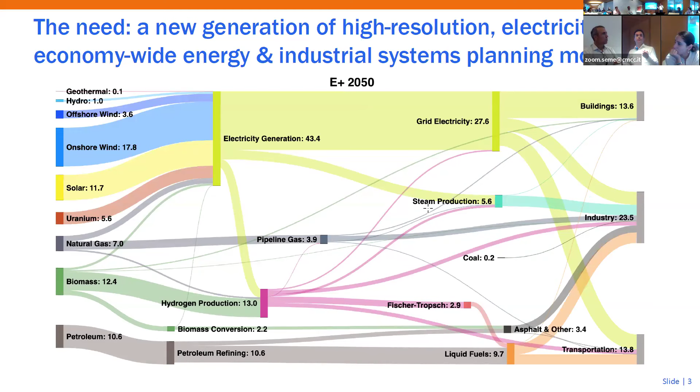So I'm sure you're all quite familiar with this picture, but the need for a new generation of models comes from the fact that with every net zero scenario, we will move from a world where a lot of energy consumption comes from different commodities like natural gas or coal to a world where a lot of it will come from electricity. And so we need electricity-centric energy system models where we have a highly detailed representation of the electricity system, because that's going to be connected to every other sector that we model.

And in a collaboration between my lab at Princeton and other researchers at MIT Energy Initiative and NYU, we've been developing a multi-sector energy system model called MACRO, which stands for Macro Energy System Capacity Expansion Resource Optimization Model. We started from macro and then we worked out the other words, but it's going to be a high-performance, bottom-up, electricity-centric energy system model. So high performance means that it's built to exploit distributed computing through decomposition methods to really increase the computational capabilities of the model.

And it's bottom-up, so it starts from the demand and the description of the technologies, and will build a capacity expansion model where we optimize capacity investments and operation of the system at the same time, with a detailed representation of different decarbonization pathways, for example, for industry. So a detailed representation of different options for iron and steel production, or ammonia production, or cement production. And we also wanted to have a granular temporal resolution, ideally hourly resolution, with a full representation of the operational year, and actually, we needed to have multiple weather years considered to increase robustness.

Macro will be open source, and it's being written with Julia and JuMP. It's not available yet. It's under development. We started development almost a year ago. And also, we wanted it to be plug and play in the sense that it's flexible and can incorporate different sectors, and you can swap in and out different sectors without changing anything of the structure.

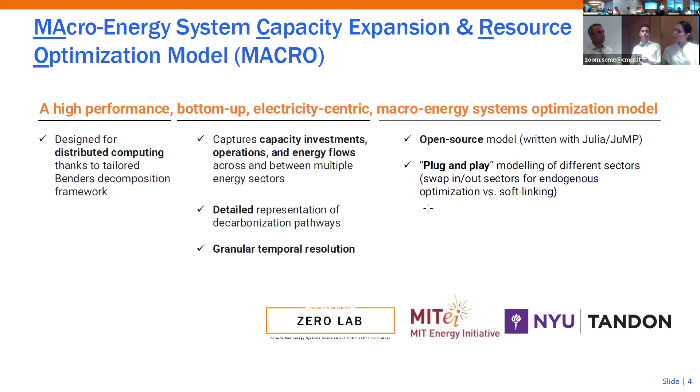So in comparison to what we call the current best-in-class bottom-up multi-sector energy system model, the main selling point for macro will be that it will have an improved computational performance that allows for a higher resolution. So if we compare to something like RIO, which is a commercial package some of you might know, it's been used for many high-profile studies like the Net Zero America study or Net Zero Australia study. So RIO typically considers for the US 20 or 30 zones and uses 41 representative days for a single year.

And from that, they then run the model. And as I said, it's been used for many high-profile studies, but the resolution is not very high. And also it does not allow to include discrete investment decisions. So discrete investment decisions might not be very relevant for electricity, because for transmission lines, we can always have multiple transmission lines.

But for big transmission lines, like DC lines, or for pipelines, if we are modeling natural gas or other commodities, then economies of scale really plays a role. And it matters whether the model thinks that it can build 3.5 pipes or it can build either 3 or 4 pipes. And so having the ability to include discrete planning decisions is key when modeling multiple sectors.

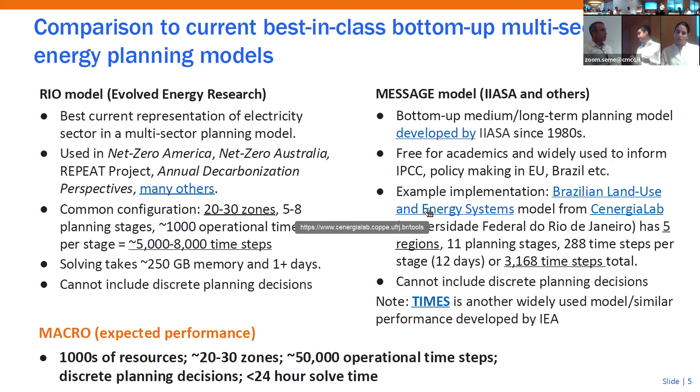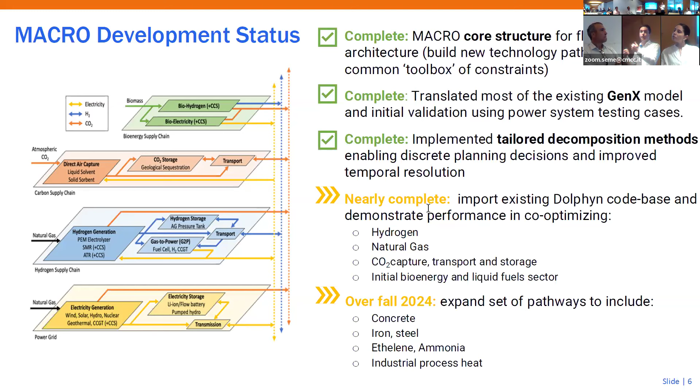So we have a library of constraints that has been implemented already and can be applied to any type of resource. And this, we hope, will really speed up the implementation of different sectors, because modelers don't need to recode everything from scratch. They can use the existing pieces.

So in the core structure of Macro, we model a multi-sector energy system as a multi-commodity flow network, where we have nodes and edges. These vertices can represent demand nodes, or they can represent transformations. Transformations move a commodity into another one, or into multiple commodities. A natural gas power plant is a basic example of a transformation: you transform natural gas into electricity and CO2. But with this structure, we can represent every industrial plant, every type of process. And so we hope that it's general enough that we can use it to really model all the sectors that I've put there.

And also we are building it in a way that is designed for distributed computing. It's being written having in mind that the main application for Macro will be with decomposition methods. So if you don't want to use a decomposition method, you probably won't use Macro. You will use some of the other models that exist, and that's perfectly fine, if you are happy with the resolution they can give you. With Macro, the idea is that you will use it to have high resolution models, and then you will use Benders decomposition or other decomposition methods to really enable that.

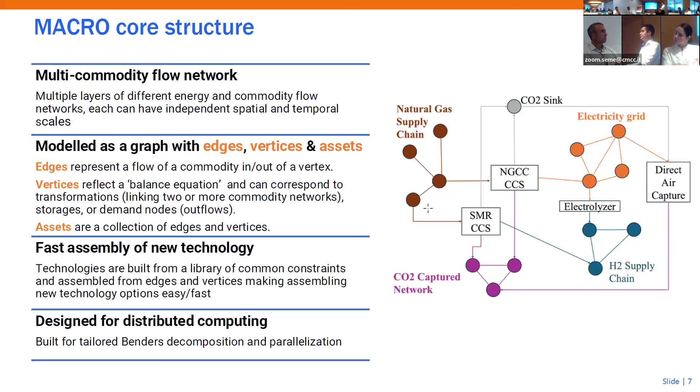So here is something I already said, but just some examples of what a vertex is. It can be a node, it can be a battery, it can be a demand node for hydrogen. A transformation can be like the red square, an electrolyzer. An edge can connect different vertices, and an asset is a collection of edges and vertices. So in this case, a natural gas CCGT is an asset that has a natural gas edge, an electricity edge, and a CO2 edge, coupled by the transformation.

So the philosophy of Macro is to have 3 different layers of users. There are going to be users who just interact with input and output files. So they don't need to know Julia. They don't need to know any actual mathematical equation. They just need to know how to build the input and how to interpret the output.

And then we have a second level, which we call modelers. They need to know Julia. So they need to be able to write some code. They might be familiar with Python and can use Julia, but they need to have some programming skills, but they don't need to know, for example, JuMP.

They don't need to know how you implement a constraint in an algebraic modeling language, because they can use the library of constraints that is already there. And so by doing this, what we have seen, for example, for China, I have a PhD student from Tsinghua University. He's implementing the iron and steel sector, and he doesn't know JuMP, he doesn't know mathematical optimization, but he knows the processes. And so by using the building blocks that Macro has, he can build the whole sector.

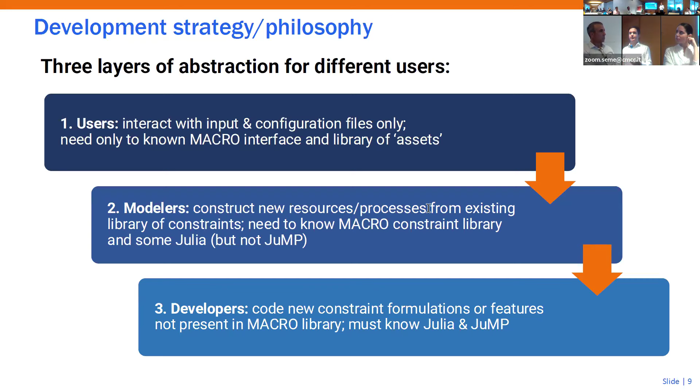And then there are the developers, who are probably going to be very few people that actually implement new features or new constraints or new modeling options. And so they have to know Julia and JuMP and be familiar with the philosophy of Macro and with the structure. But the idea is that the asset hides most of the mathematical complexity of the model. And so if you are a modeler, you just work on the assets. You don't need to know that there are vertices and edges and all this stuff. So hopefully this will allow for a lot of people to find Macro useful.

The general workflow in Macro is to start from the input data, which is going to be in a combination of JSON files and CSV files for time series. And then slowly, you build the model, you load all the networks, you generate the model, and this is an optimization model that then gets solved. And then with the solution, you need to have some downscaling methods to unpack your solution, because if you do a study like a net zero study for the US, you're not going to represent every single industrial facility in the US. You will represent some aggregation of that. And so you need to have some downscaling methods to then represent those results at the final resolution.

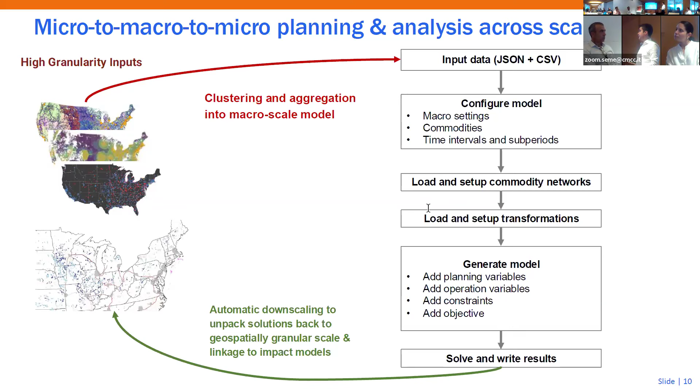All this results in increasing computational requirements for the models, right? Because everything that I talked about: having multiple commodities, multiple energy networks, having high temporal resolution, having a wide range of scenarios to improve robustness. So you want to consider different weather years, for example, for renewables, and having discrete investment and retirement decisions. So all these things will increase computational time very rapidly. And with the discrete investment decision, the increase becomes non-polynomial, right? So we really cannot solve the model as it is. Even the best commercial solvers will struggle, as we will see, to solve these models. So we need to advance the computational methods in order to enable these high resolution models and make them useful.

Typically, what modelers do, and this is something that probably some of you have also done, you work with a combination of either using different sampling representative periods to represent the system, or aggregating regions, or maybe ignoring or relaxing some operational constraints in order for the model to be computationally practical. However, these abstractions come at a cost of a significantly reduced accuracy of the model. And so this might affect the recommendations that we make out of the model, and the ability of the model to provide real decision support for decision makers, whether it's industry or policymakers. So in this research that I'm presenting today, we move away from the standard practice of having some form of abstraction to simplify the model, and we focus instead on the computational methods to improve the computational capabilities of energy system planning models.

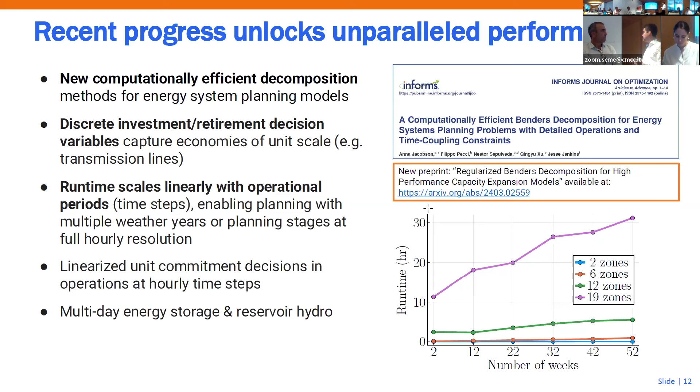So how does this work? When we look at models, and this is common to all models, it's not only Macro, it's not only GenX, which is the electricity system model we developed at Zero Lab, it's not only PyPSA or Switch. Every model has this structure, and it looks like it's just a monolithic model with no structure, but actually by looking at it closely, we can discover some block structure, which I'm going to highlight here.

So in these models, in energy system planning models, we have an objective that typically is to minimize costs, defined as a sum of investments and operating costs. And there is a little sigma there, which is the probability assigned to that week. So if you're doing a multiple scenario analysis, you will have a certain weight assigned to a specific weather year based on previous distributions, and you can input it there.

And then we have operational decisions. These are unit commitment states, power flows or energy flows, and this kind of operational decision like storage levels. And they are time series. They have hourly resolution. They can be grouped into operational subperiods, and those are represented by the index W. So the index W is the week. And for a year, we have 52 weeks, so 52 subperiods.

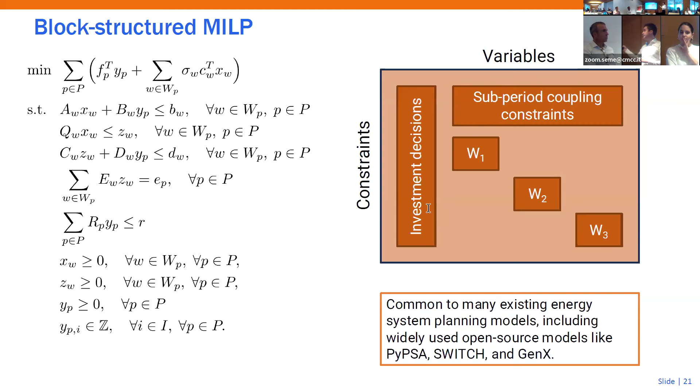So when we look at it, this looks like an arrow-headed block structure where we have investment decisions that couple all operational periods, and also some coupling constraints like storage constraints that couple the periods. But then the individual operational weeks are decoupled once we remove the storage and investment decisions. And this is, as I said, common to many widely used open source models. So we started off from this block structure and designed the decomposition methods to exploit the structure and enable high performance models. So in a standard Benders decomposition method, which some of you might be familiar with, but I will review it very quickly.

In a standard Benders decomposition method, we treat the investment decisions as complicating variables. So we separate those from the rest of the problem. And we define two models: a planning subproblem, where we make investment decisions based on some approximation of the operating cost, and an operational subproblem where we optimize the operation of the system given those investment decisions we made.

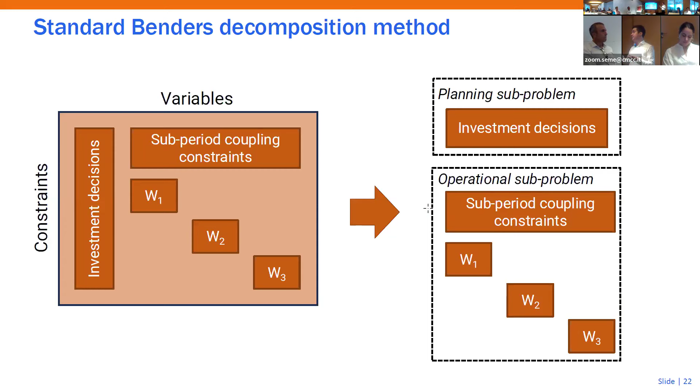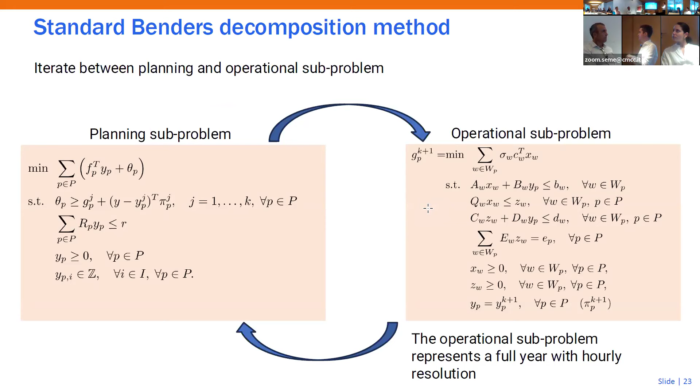And the one thing we need to notice here is that the operational subproblem is a full year, right? It's a full year with hourly resolution. Here we have not decomposed the operational year. So it's very demanding to solve this model. And especially in a Benders decomposition method where you do many iterations, that's going to be a problem. Here, it's just a mathematical version of the previous plot where we define what the planning subproblem is and the operational subproblem is.

So what we did was we included the sub-period linking variables like storage levels at the beginning and end of each period into the planning problem. So we treat them as planning decisions. And once those are fixed, then the operation of the system becomes decoupled in time. We can operate each operational week independently of the others because we are fixing all the sub-period coupling variables into

the planning problem. So with this trick, now we are able to distribute the computation and the solution of each operational week over multiple cores. And this is what gives the advantage of this method. So you need to have computational power, and we are lucky in Princeton to have it, so it's good.

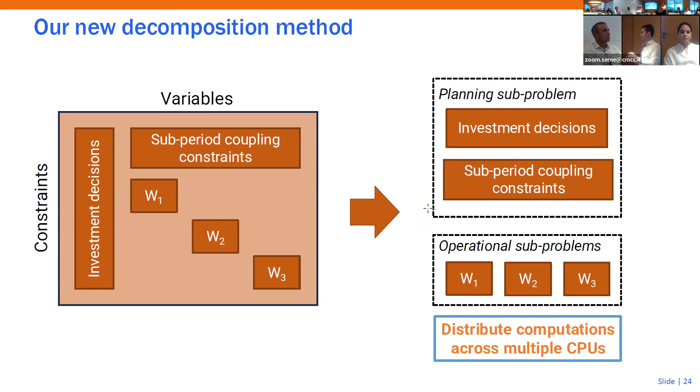The decomposition method iterates then between a planning problem where you choose the investment and timing decisions and these sub-period coupling decisions like storage levels, and an operational problem where you just optimize the operation during the week, and you can optimize those in parallel. So what's the convergence between these two subproblems compared to the standard methods?

So the convergence is the same, and the framework for convergence is the same as for standard Benders decomposition method. It's just a different way of defining the planning and the operational subproblem. The solution of the planning subproblem gives a lower bound to the final optimal cost, and then you compute an upper bound to the optimal cost by optimizing the operation of the system for the investment decisions that you have made. And you iterate between the two until lower and upper bound are close, and you stop once they are close. So it's the same as standard Benders.

Does it take longer to converge? Well, yes, but we will talk more about that later. So it can take long to converge because these methods are known to suffer from instabilities, especially at early iterations. You can imagine here the planning subproblem makes investment decisions based on an approximation of the operating cost. So at early iterations, that approximation of the operating cost is quite poor.

And so you might make very weird, extreme decisions because you think that there is no cost in not serving electricity to a region because you don't have a representation of the whole power flow in it. So there are techniques that we apply to regularize the algorithm and avoid these extreme decisions and enable fast convergence.

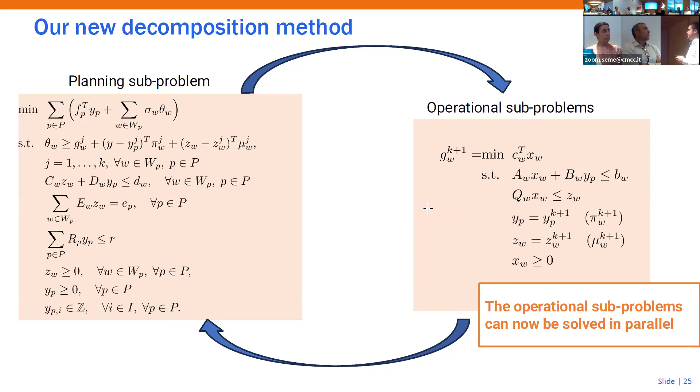So I'm going to show some results now based on this first method that I talked about. We consider these four systems where we have different extensions of the US electricity system in GenX, with a single period planning model with hourly resolution. So we have 52 operational weeks with a CO2 cap constraint.

And for this benchmarking, I'm only considering continuous investment decisions. So we will see later on what we do with discrete investment decisions. And this is a report, and you can find more details in the journal paper.

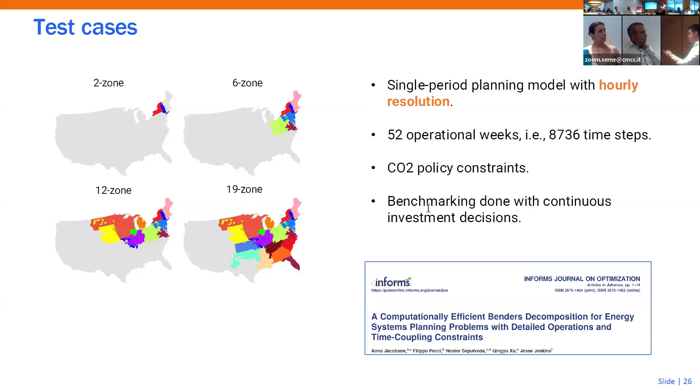But the main picture is this one, which I already showed, where we see that for those 4 different systems, the runtime with the decomposition method grows linearly with the number of weeks that you consider. So if you consider 2 representative weeks, 12, 22, 32, 52, then you get a linear increase in runtime by distributing the computation over multiple cores. So here in the 52 case, we are using 52 cores. Each core optimizes 1 week.

And we can see that it outperforms a standard Benders decomposition, where we consider the full operational year as a whole. The largest case that we were able to solve in 2 days with a standard Benders approach was a 6 zone with 22 weeks. But we can see that the new method has a much faster convergence, both in terms of number of iterations and in terms of computational cost of each iteration.

And one reason for that is also that for each operational week, we are adding 1 cut to the planning model. A cut is a linear inequality, and it's the way that we communicate to the planning model how to improve the approximation of the operating cost. And if we consider a standard approach, we would add a single cut, so a single piece of information for each iteration. In this distributed approach, we are actually adding 52 cuts every iteration, so we add much more information.

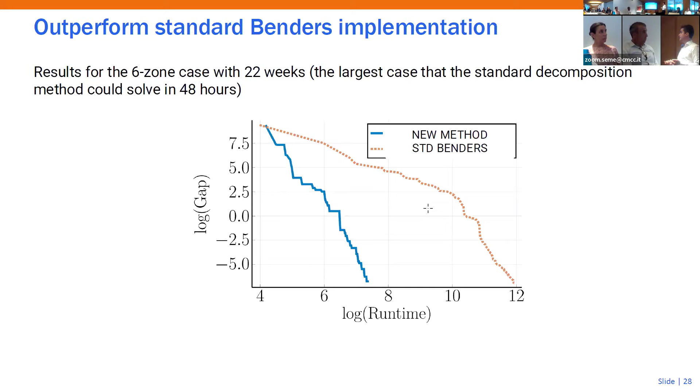As we will see in the results later on, this method works okay, but still it can be quite slow in terms of number of iterations. And we saw that because we were still using something like 30 hours for solving a 52 weeks case. I said our objective was to go to less than 24 hours, right? So it's still quite slow. But

we made further progress using something called level set regularization. There is a lot of maths here, but the main idea is that we take the solution of the planning model and those investment decisions that were chosen to minimize the total cost based on the approximation of the operating cost. And those solutions might be extreme, so we correct them by solving another linear program called a level set problem, where we look for a different solution that is nearby the solution that was computed by the planning model.

And the definition of nearby is given by the level set constraint, where we say that we are looking for a solution that is only slightly suboptimal for the planning model, instead of being the actual optimal solution of the planning model. And this method is very common to regularize cutting plane methods like Benders decomposition.

And there are a couple of different choices that can be made to set up this level set problem. One is to use an L2 norm of the distance from your regularized solution to the solution of the planning model, the unstable solution. And the other one is to just look into the interior of the feasible set of the planning model. And we will see that that's actually the best option.

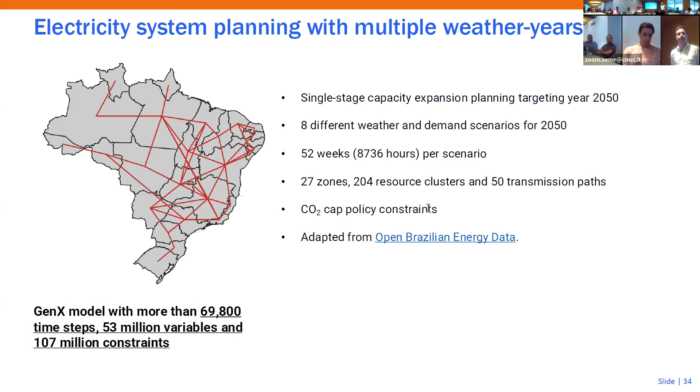Yeah, thanks, Filippo. Very interesting, and especially a very impressive improvement in terms of feasibility and numerical solution. I have three comments or questions. So the first one is on this selection, I forgot the exact name. It looks a bit like near optimal solutions, where you're also able to look at the cost differences, how far off these near optimal solutions are from the first solution you find.

Let me just explain a bit better maybe. So the solution that we pick here from the level set problem is near optimal for the planning model, and it's near optimal by alpha, and alpha is something that you choose. But then the algorithm stops only when the lower bound computed from the planning model and the upper bound computed from solving the operation model are very close, like 0.1%. So the actual solution in the end is optimal up to 0.1%.

The investment decisions that you try the operation on are alpha suboptimal for the planning model. And alpha, in this case, typically 0.5 works, but it's a parameter that you can tune.

Okay. Then another two questions before Laurent has another question. On the extensions, a very nice list of future potential works, a lot of which is very relevant. One on the demand side, maybe. You said it's kind of exogenous. So which type is the first thing you would go for, because there's a lot of things like rationality. For instance, for transportation, for vehicle choice, is there some multinomial logit or something that you can connect to the model on the demand side without adding complexity?

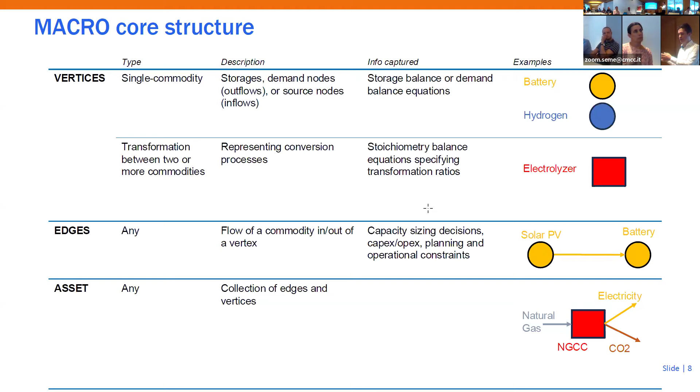But in principle, every sector that can be represented as a multi-commodity flow can be included, and we can apply the decomposition I talked about too. The issue is mainly that if you increase the scope of the sectors, you will increase the scope of the model, and so the model might be slow. And so there is more fundamental work to be done to solve this problem here. Instead of number of zones, you can think about number of sectors. The dynamic will be the same. So we need to find a way to solve that. Okay, thank you.

But I was thinking, how do you solve that, if there are a lot of inputs and a lot of outputs which connect the various zones, for example? So, for example, we could aggregate the system within the algorithm. The algorithm could use some aggregated version of the system, which is done in a way that you always underestimate the operating cost, like you aggregate different generators and you pick the best efficiency. If you do this aggregation, then you could compute some Benders cuts for the aggregated model, and those will be valid for the full resolution model.

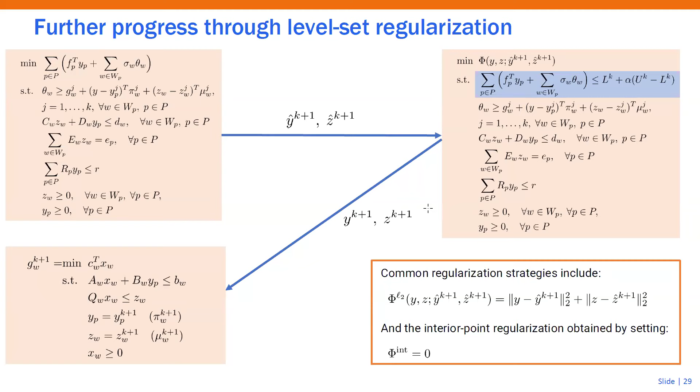And also because what I'm thinking is usually land use models work on a grid level. So they have, I mean, the grid could depend on the resolution that the model wants, but I've noticed that your spatial units are zones. So I'm wondering how these grids versus zones, if you have thought about this, or what is the connection that you want to do? Yeah, so

first of all, in Macro, we don't need to have the same spatial resolution for every sector. So we can represent the biomass sector as a single zone for the whole US, and the electricity sector with 5,000 zones. So the resolution of the sectors is completely independent. So we can choose whatever resolution makes more sense.

I think currently how biomass is represented is that we get a mapping from a region, which typically are states, to this electricity zone, which are mainly the electricity zones for different electricity operators. There is some weird intersection, but it's mainly that. So we map the state, well, actually the county, to the electricity zone. And then we have data for biomass in each county, which gets aggregated to whatever level we want based on the choice the modeler makes.

And then we have some regional supply curves that for each county give the price of a given flow of biomass, which depends on the volume. And so we have these regional supply curves to represent that price. This is a very basic representation of the biomass feedstocks, and we would like instead to be able to model land use and agriculture with much greater detail. But yeah, I don't have the skills to do that, so we need help. So if you want to work on it, it would be great.

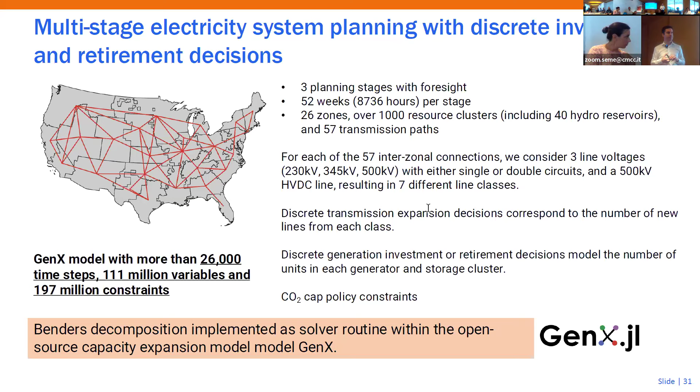Okay. And how does it scale with the number of representative periods? I think you showed this. It scales linearly with the number of weeks, yes. Okay. Thank you.